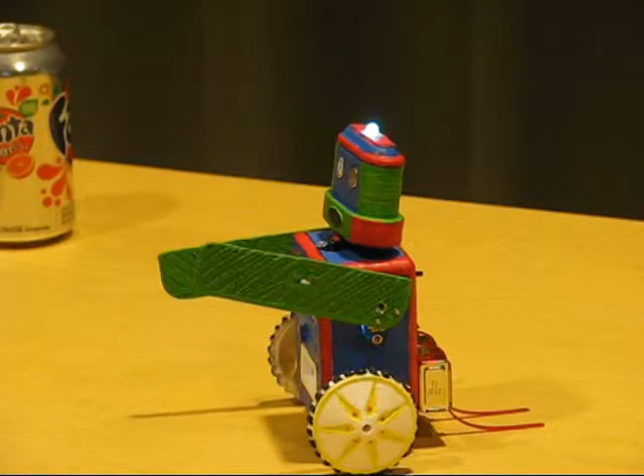This is Walt Perko's own Billy Bot, live in person. So Walt's not a club member, right? I don't believe he's a club member anymore. He's not a club member. He's a notorious spammer. But regardless, this is the infamous Billy Bot, and he's on his world tour, so I'm bringing him to the Homebrew Club. He basically just turns around and moves his arms and blinks his lights.

He's 3D printed, and Walt has all the code on the web, download free, open source. This one's basically, I think he uses pickaxes, and he does RoboTunes, right? And RoboTunes, well, the problem with RoboTunes is they aren't funny. Okay? So somebody please send him some money so he can hire some decent writers and maybe have a go of it. I mean, he's got a whole fleet of little robot characters, and it's pretty cool.

And he's got all the stuff online, open source, so you can download and print your own Billy Bot or so forth. Let me get a picture here. So did you print this, or where's it from? Oh, negative, this is the original Billy Bot on world tour. Besides Silicon Valley, he's been to Minnesota.

Okay, so I've gotten some pictures of him around. I want to get a picture of him in front of the Google building, and then he'll be off to somewhere else. You can follow him on Facebook if you'd like. So this is the Billy Bot by Walt Perko. Thank you very much.

It's running? Okay, we'll go with Mark then.

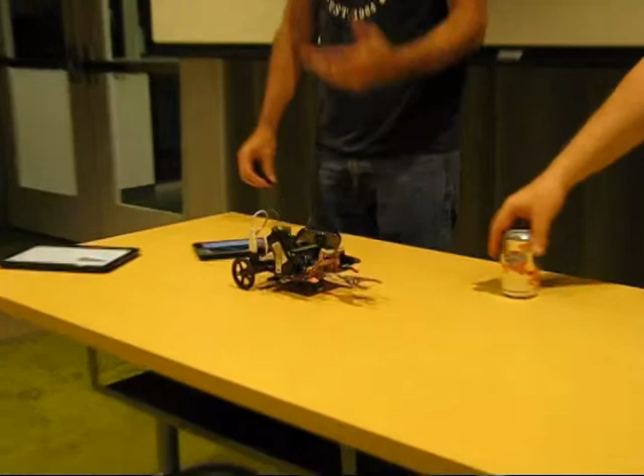It's a full-blown ROS system that now has a webcam. It's called FiddlerBot because it has a fiddler claw. I need to make another claw on the other side that's a tiny, wimpy one. Then the image will be complete.

This guy has a pan camera here, and if there's any luck in the world at all, I'll be able to show you guys its remote control interface. I'll fire it up with a separate terminal, and if it starts moving, please tell me.

So what we have here is a little gizmo, which was originally color-coded so that I could find it with a different system that I had a lot of grief with. Sorry this is so small.

There is an HDMI. If we have any luck, it may work by plugging it in here, and that would make this a lot nicer. We can give it a try - there it is on the ground. I found it a little earlier, and it's this one. Let's give it a shot. I've got this adapter, unplug this guy.

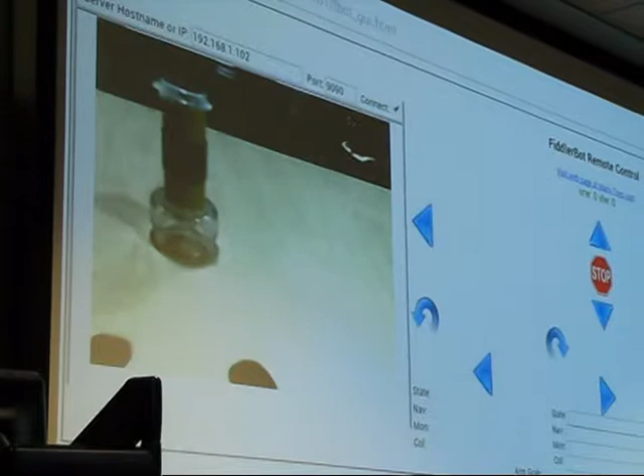So this has a ROS system on it. It has the ability to recognize AR tags. It talks to a JavaScript file that talks to ROS Bridge. ROS Bridge is an interface that allows you to talk to ROS message queues, or topics, whatever you want to call them. I don't know why they call them topics, but you can talk to them.

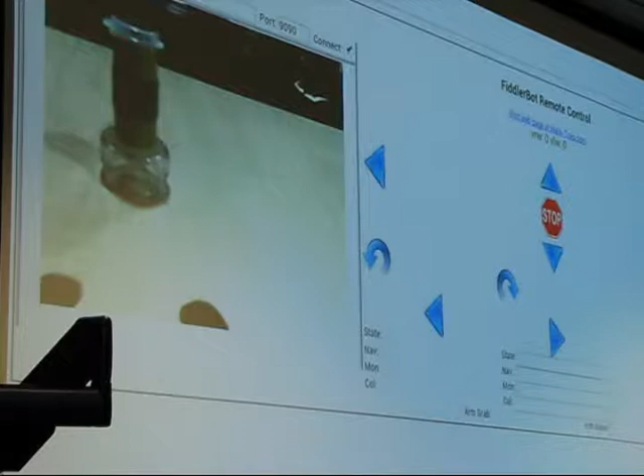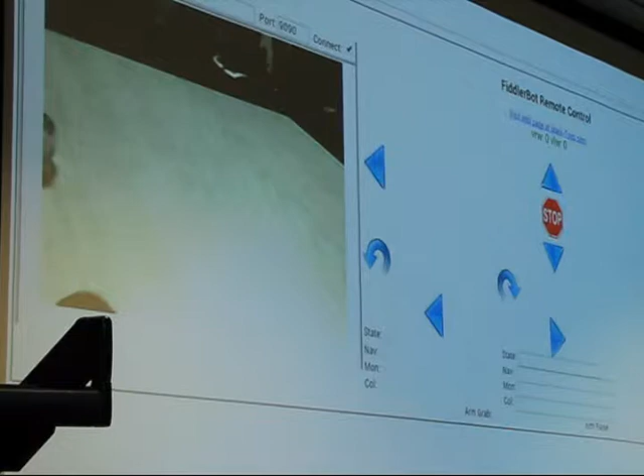What I'm doing here is I have a little RF controller over there that I've shown before in the past - this will work with that. One of the boards on my custom thing is that, but it also does pan, and tilt and so forth with the web controls. So if I go one way or the other way, I can go towards the thing.

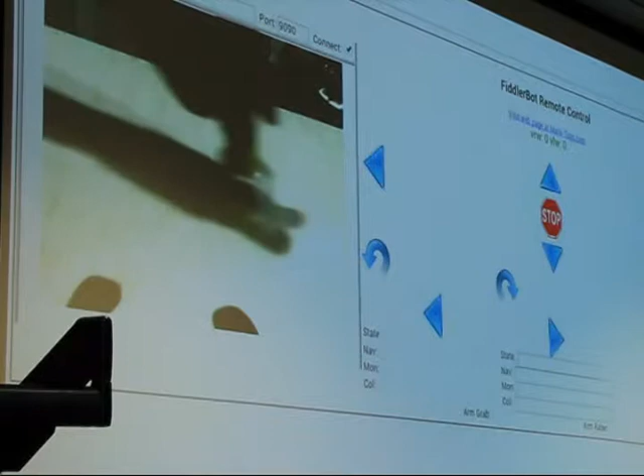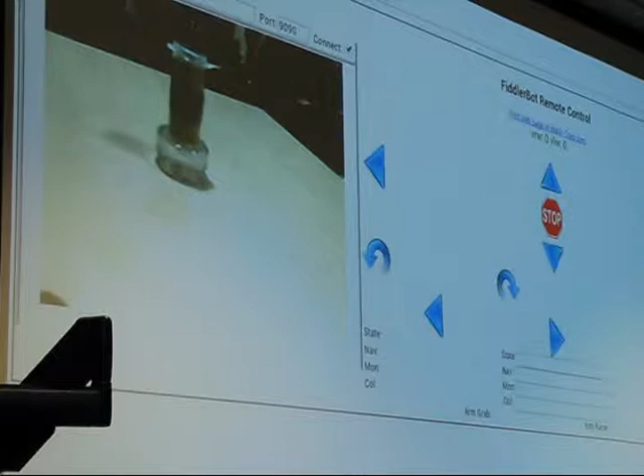That's not actually very exciting because it's dead centered right now. So if I pan over towards it here, this is kind of just a simple remote interface. So now I see it over there, so I'm going to rotate this way and then stop - oh, because I needed to be panned over farther this way. I need to set up the camera so that I see the bottom of the claw nicely.

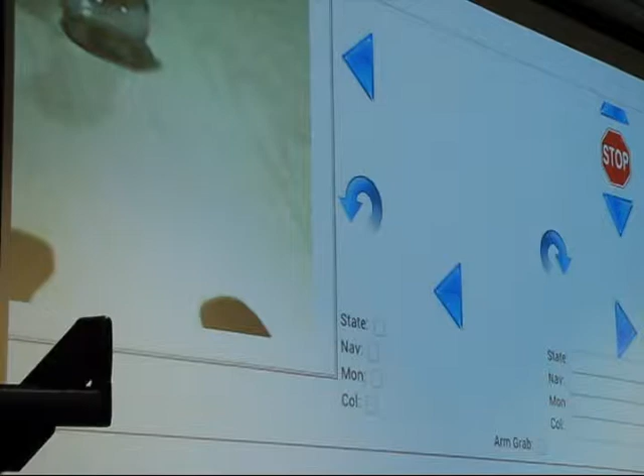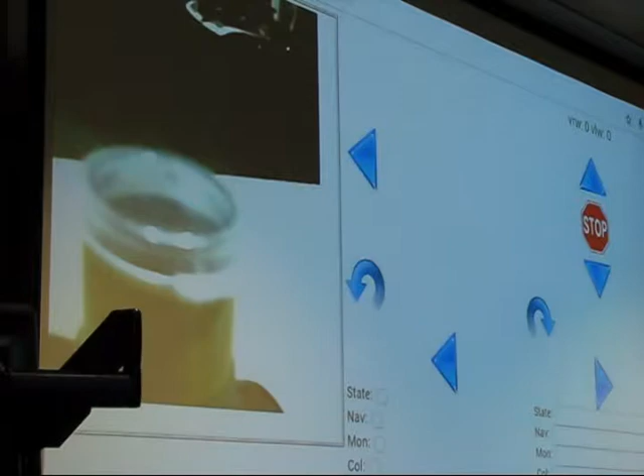And so now I can see the claw, and the claw is straight ahead always. So if I go forward - this interface I thought would look nicer here, but there, I guess we can see it now. It's okay. All right, so now we go a little bit forward, and we've captured it.

I had to solder 6 wires to a 2mm by 3mm chip. That was a pain, but I did it. It's like this - oh, come on.

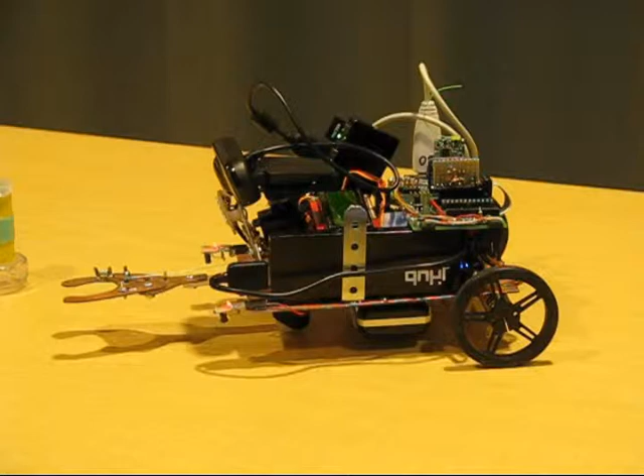We can rotate and stop, or rotate the other way, which is a better idea, and move forward, etc. So that's what he does. There's a lot more to him - he's got a lot of sensors, an LCD display, a couple batteries, because you don't want to run the batteries for the servo on the main controller, that's a problem. So he's got a nice little multi-channel servo controller doing the pan tilt and all that kind of stuff.

Any questions? Steve is working on a radio compass so we can return to base, and we're making progress on all things. There's safety concerns - we have to have a power e-stop. The robot can't go faster than a person, so if it runs away, someone can stop it.

This guy right now could definitely run faster than a person. He's not armed, though. Well, the thing is, hopefully it does have a dead man switch. If I turn it off, it should not run away.

By regulation, they have a kill switch which kills all power to all systems, which seems kind of bizarre to me. You just want to kill power to the motors, a big red key that says panic. Yeah, thanks, I guess it makes sense for safety.

Yes, and it has to climb up onto a shallow platform and return to it. So it's pretty cool. So we have other members of the team here who may wish to talk. We have our actual sample return mechanism, where we have Paul and Gertz working on that.

We want to come up on that, and so I'll move the base out of the way. Leave the base so they can put it on top of it, so they can see it. Well, all right, but I will turn them off so they can't run away.

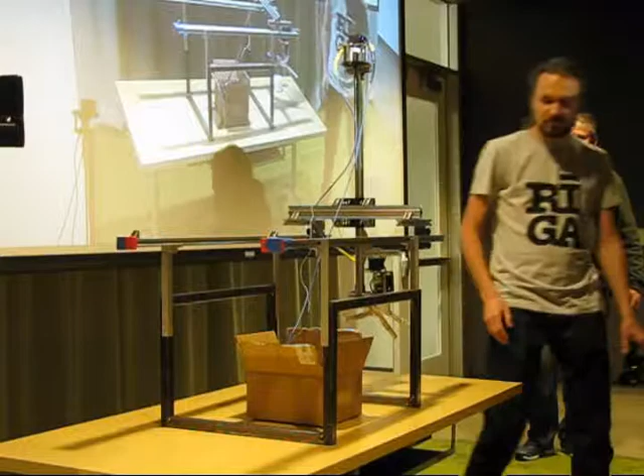Okay, so this contraption goes onto that base. Paul and the gripper team has constructed this hardware, and I added some.

Close the door, maybe? Yeah, basically have to put a small one. Talk louder, Dirk. Actually, let's see if it's this one. No, it's that one. Yeah, you got it. Okay, so...

Yeah, basically the control of this thing currently works on Dynamixel servos. So I added some BeagleBone Black and ROS and joystick control so we can see if this actually can move.

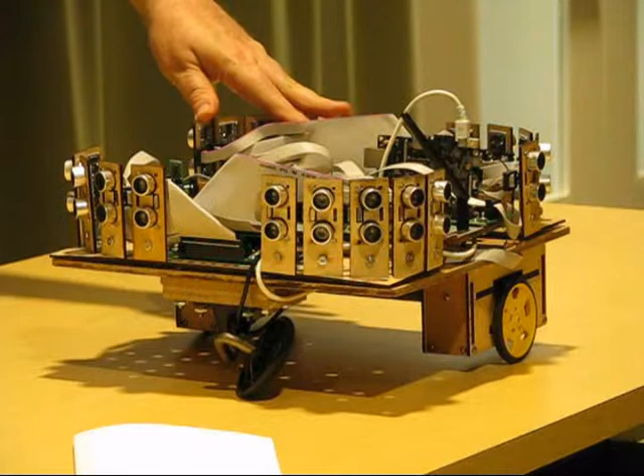This is my robot. This is pegboard, laser cut plywood. You see I went a little overboard on the sensors.

We're trying to see whether or not it's homebrewed, man. The thing is, the sonars, when I first started, cost - we had to buy repurposed Polaroid sensors. Polaroid's gone, for $70, okay?

The way I buy these things now is I go on eBay and buy them in lots - one lot cost $1.05 each. I'm not saying these are the greatest sonars in the world, they're not, but they're cheap, and basically what I'm trying to do is come up with something good enough to do obstacle avoidance. That's really my only goal in life here.

If I could get a cheap LiDAR from Neato or something like that, I would do so. I know a guy who knows a guy. Oh, okay, yeah, I'd much rather use a LiDAR, but given that you don't have that.

So the other thing going on here is I have a board that I can plug in any processor that conforms to the de facto standard 40-pin connector from the Raspberry Pi Foundation. So I have here a Raspberry Pi 2. I do have it up and running Ubuntu 14.04.